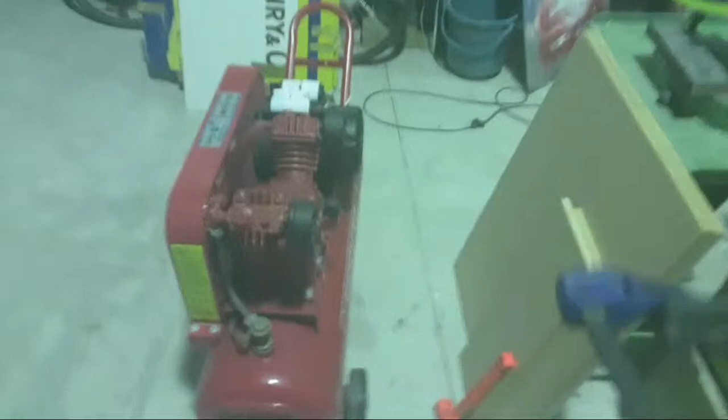We've got this set up the wrong way. It's sort of a good thing, but it doesn't always work that well. Hang on, let's fix this. Got 2 sheets of MDF here, which is sort of in the way, but that's a work project, so we'll get them out of the way soon enough. Need a bigger clamp - there we go.

So anyway, picked up this air compressor - a friend had it sort of as surplus, along with a lot of other junk, and couldn't really be bothered finding out what was wrong with it. So it had an electrical problem apparently, and he asked for an offer, and I made an offer that was a bit ridiculous, and we sort of negotiated a bit on that. And I come home with an air compressor that wasn't working, which is cool because I need an air compressor.

Let's have a look here. We can turn it around sort of half a turn. It says it's 283 somethings - 283 litres a minute, that's the pump displacement, and free air delivery is 178 litres a minute. So, yeah, I don't know if that's good or bad or what. Humidity 90% sounds fantastic, it's freezing cold here.

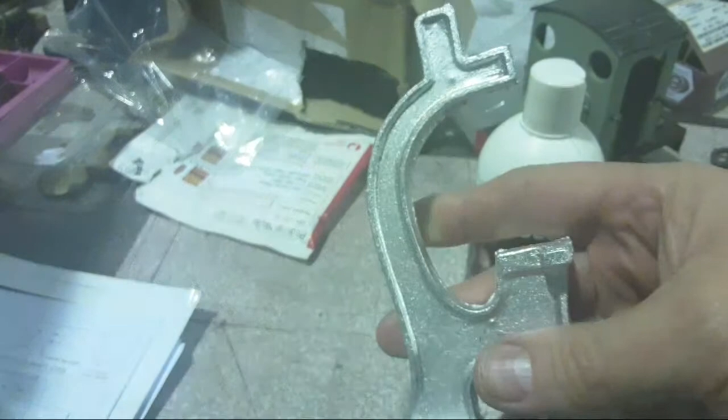So anyway, I've hit up a gentleman in the UK who posted a video about this awesome little bandsaw. I'm sure he's probably watching, so I'm going to... We might as well just get into it. myfordboy posted a video about this awesome little bandsaw that he made, MFB on there.

Nice casting, with 3D printed wheels, like bandsaw wheels for the belt, and another drive wheel, which are nice little 3D prints actually. Not bad 3D prints at all, considering all things. Yeah, right.

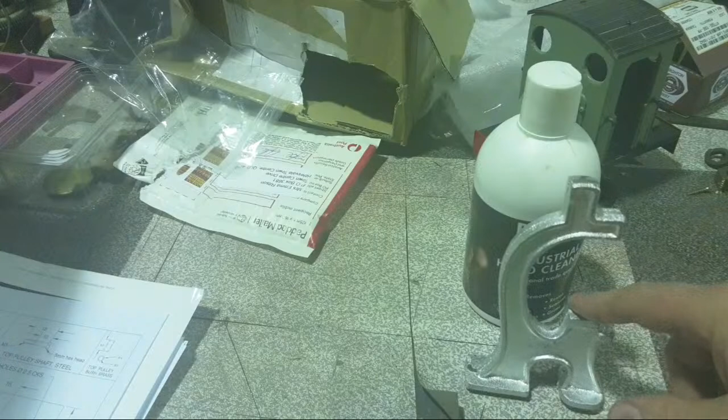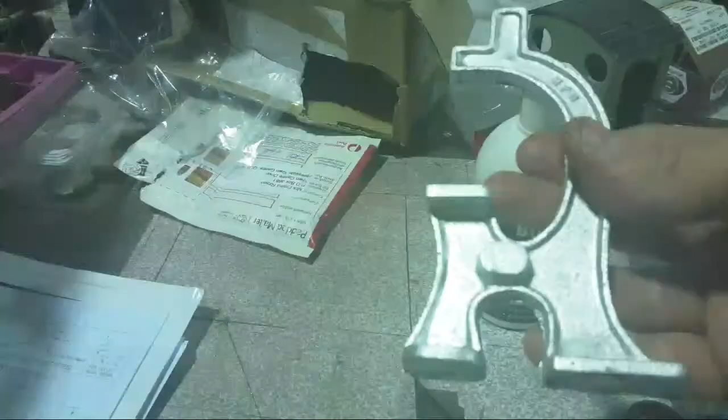And this little saw, I sent him an email saying, hey look, I'd like one of them, so anyway, we organised that, and he said, 'I'll cast you one.' So anyway, he posted it along, which is a nice little, pretty high zinc aluminium casting. It is a nice casting, nice finish on it. From experience, it'll probably machine pretty nice. It's not a huge job. Comes with a drawing sheet.

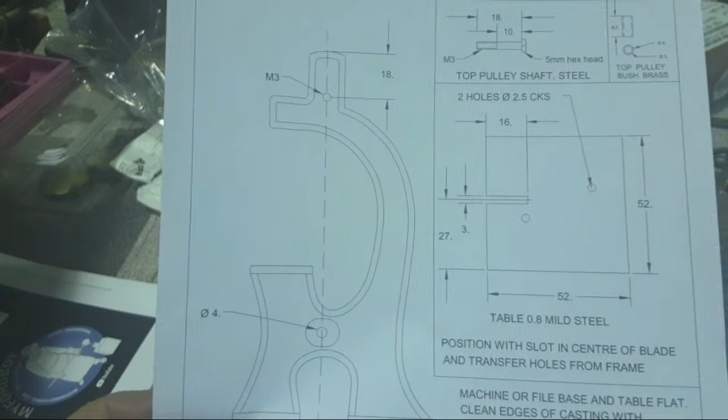I've already got a myfordboy steam engine, so that's probably what's going to drive it, to be honest. It's a bit overpowered, but we might have to make a line shaft or something for it. So pretty simple job. There's a table, which is a bit of 0.8 mild steel sheet metal. There's a bolt and a bush for the top, and a drive shaft that goes through the middle, and a couple of flat surfaces and 6 holes, something like that.

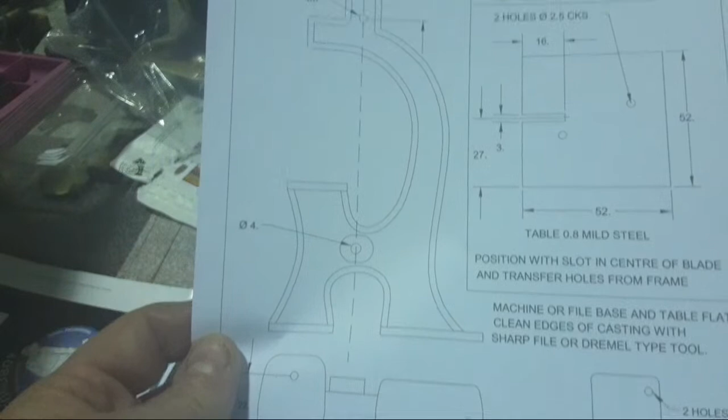It's pretty straightforward, just a toy. It's based on, I think probably, a Mamod Model Workshop accessory, and it's not too shabby. So at some point when I've got a mill, that's a weekend's work, and it'd be fun, and we could belt it up to myfordboy's little engine and have a pretty cool little workshop, or the start of one. And as he releases them, we could maybe get some others. No pressure there.

Also sent, this is like a myfordboy sticker, really - it's almost impossible to get. Sent some stickers, so I'm going to put one on my board, and I might redistribute the others at some point. So there we go.

That's pretty exciting. Now, issue being that while we're on the job and things were coming from the UK - this is something I've been thinking about for some time, and this is where it all gets a bit sticky and a little bit difficult morally and ethically, and a little bit complicated.

Because coming this crap, where can we move this? Move this up here, I'll lock this back on here. There we go, without disturbing anything. Don't know if we can see that, but it come in this box, and the bandsaw was a bit stupid in this box, so we thought we might as well pad it out.

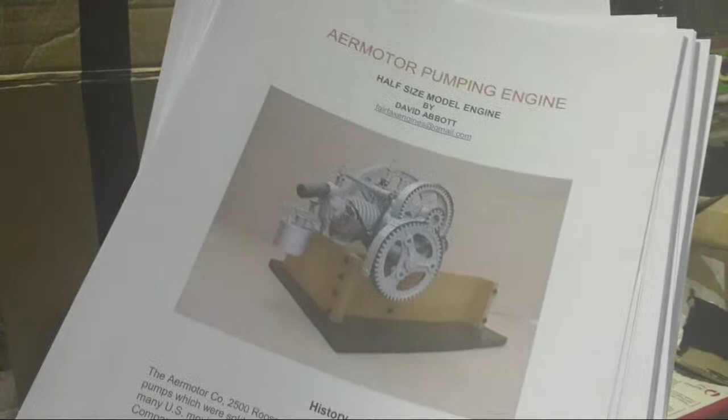Anyway, this box come from myfordboy, which is awesome, but it seemed a bit pointless just sending it empty. So he sent some stickers, and he sent the bandsaw, and he sent a set of drawings for this, which you may have seen if you watched myfordboy's videos back far enough.

And what else? A set of flywheel - move this over so you can see. Nice flywheel, and the pump gear, and the push rod.

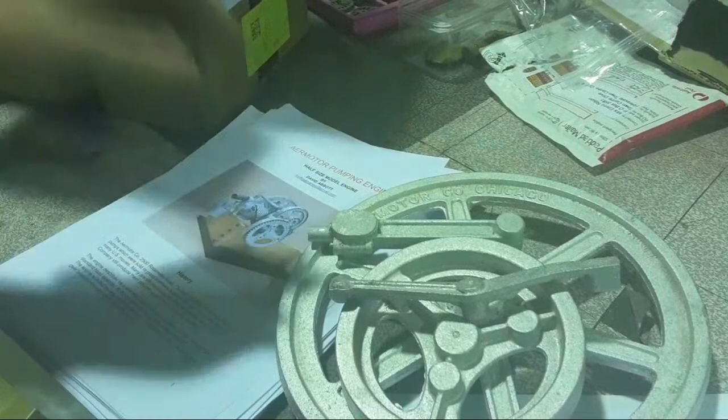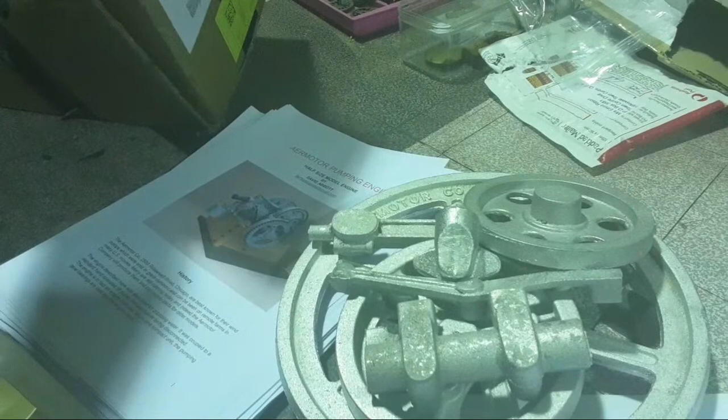And a con rod, and some other fittings, some main bearings, and a timing gear, and a carburetor, and an igniter casting, and a bit of corian for an igniter insulator, and what I believe is probably timing gear or pump gear, something like that. And a crankcase casting.

Now, everyone's going to get all upset about this, right? Because I have a very, very, very, very, very bad track record with internal combustion engine models.

However, this is one of myfordboy's biggest engine casting kits, right? And as such, I don't think that he's going to be making them forever. I'm saying another 20 years probably is your time frame on this. But it won't hurt to have one sitting here in case at some point I finally get that Stewart 500 running, the Stewart running.

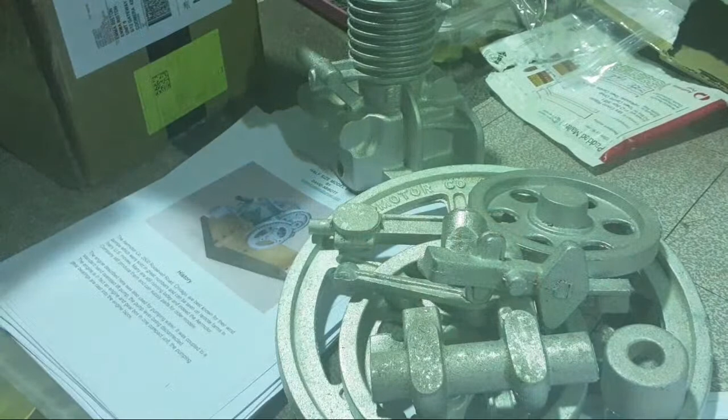Anyway, this isn't going to happen any time soon. They're all aluminium castings, but most of them are fairly zinc heavy, so they're pretty solid castings. There's some complicated bits like a trip igniter. And there's a couple of 12 DP gears - I don't know if they're 12 DP. I know that these ones are, this one and this one. This one here and this one here, I think are 12 DP.

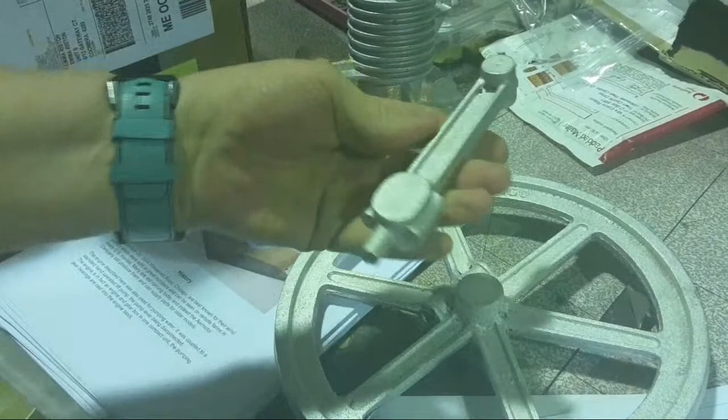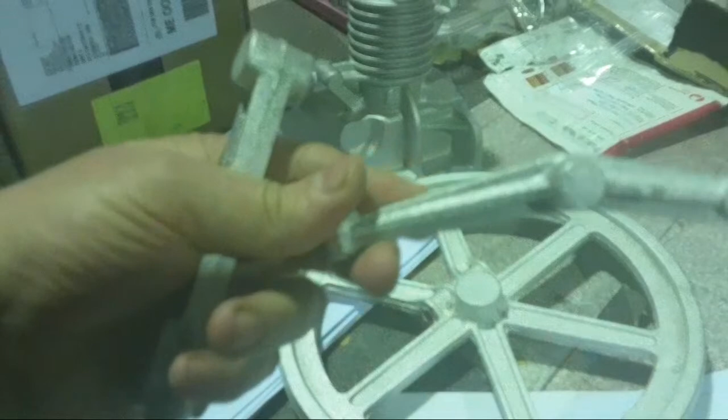So there's a little con rod, which is aluminium too. It shouldn't backfire and bend that, I guess - it's pretty solid still. There's a nice long tappet or rocker arm for the intake valve, or the exhaust valve, that is, and that's the exhaust valve.

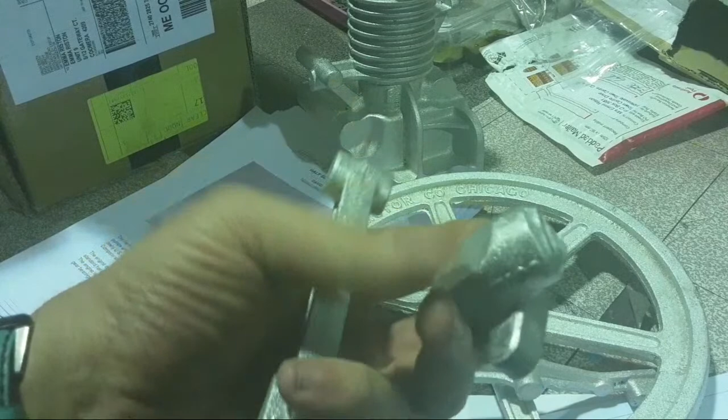That's a timing gear, apparently, I think. There is a video at the myfordboy channel about this. This is a fairly solid flywheel, but I think we can machine that.

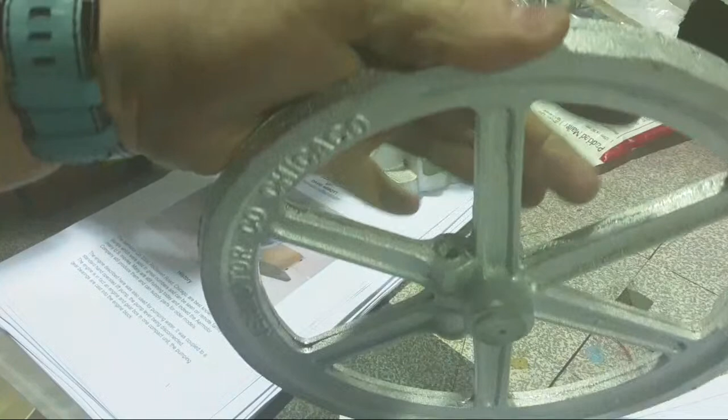It's actually got a cored bolt hole there, and then it's split halfway through and machined with a key. The bolt doesn't do much, only just for cosmetics, I think. But it's not a bad looking flywheel. That's pretty heavy, actually - pretty solid flywheel.

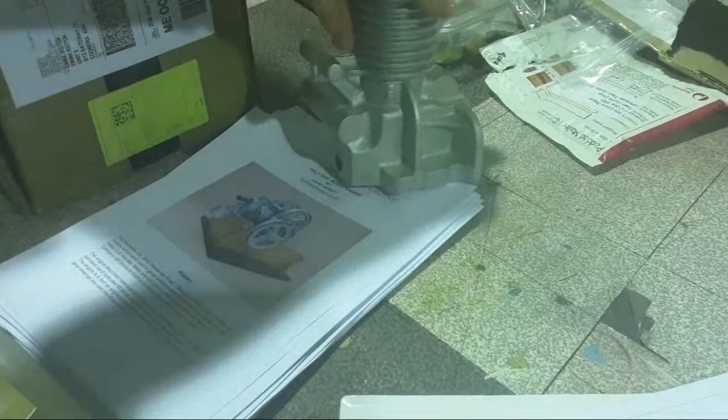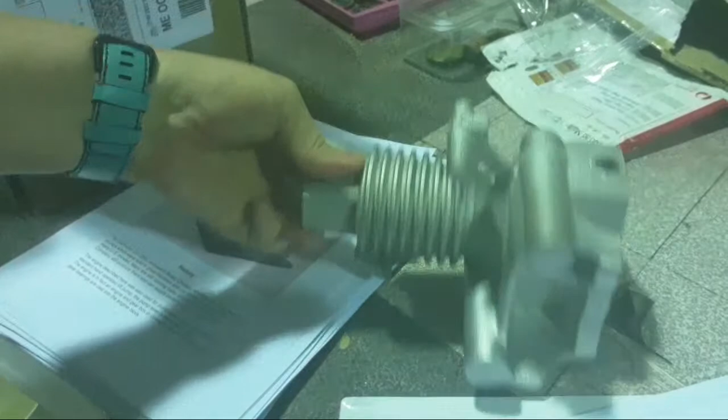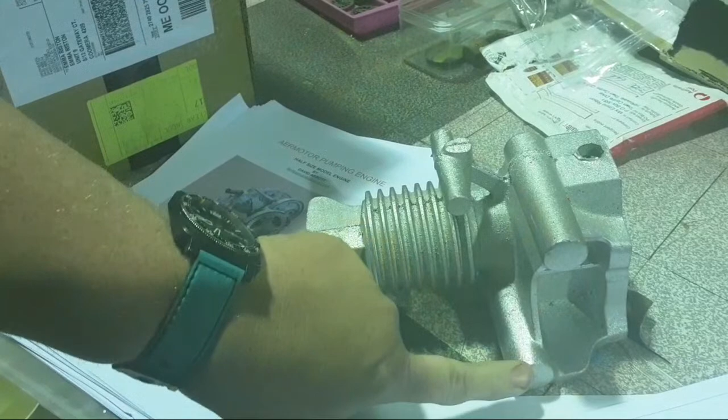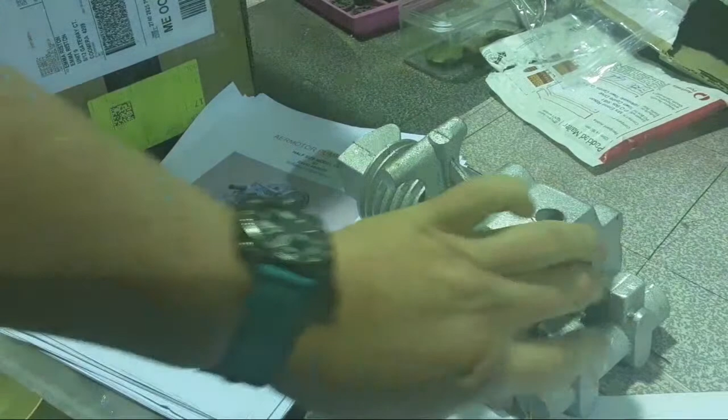It's got letters and everything in it. And there's this, which has a cast iron liner that goes in it. The rocker arm goes on here in the igniter drive, and the camshaft's on this one, I think. And the main pump drive for the windmill pump goes on here. The crankshaft goes on the back here with a couple of bearings, which are these, with spaces in them for little oil pots and everything.

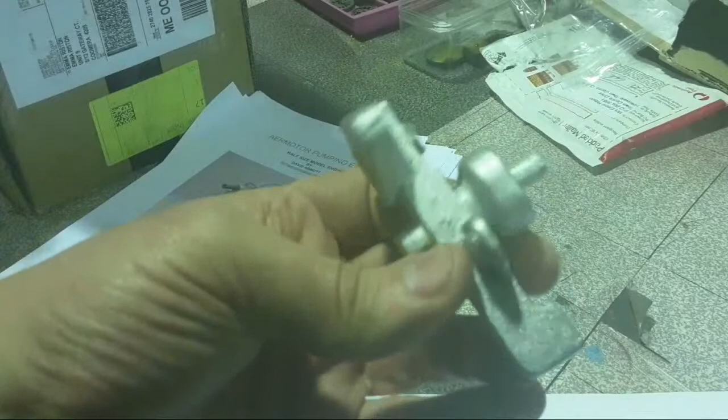Now, I don't know about this. I thought this was a cored casting, but it doesn't look like it was. To my mind, when I saw the video - I've watched it a few times over the last 18 months - I thought I'd like one of these. It looked like a very, very fiddly casting to do with a core in it. I'll forgive him if it doesn't, but it's probably not a huge deal just to drill it.

But that's a carburettor casting. Chirpy, you're right on, yeah, that's right. It's got a... he says that, but he's cast this with a zinc alloy, so seriously, there's plenty of weight in that.

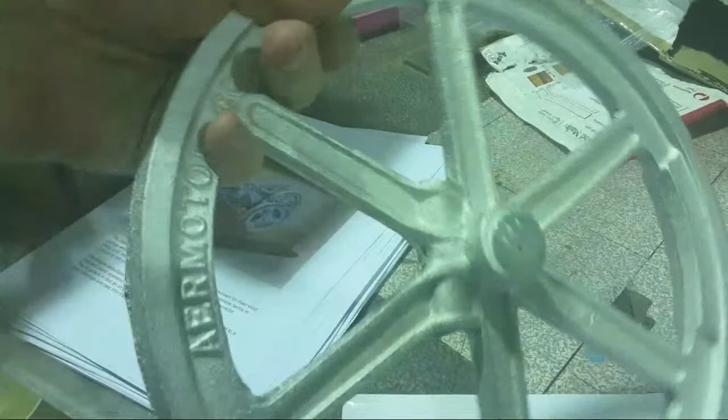That's a pretty heavy flywheel. That would weigh probably 4 kilograms, something like that. So some nice castings.

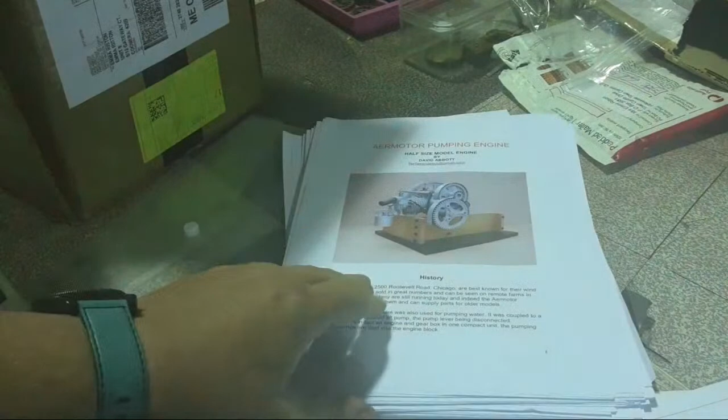It's got a book with basically pages and pages and pages of drawings and notes on building each and every part, how to set it up, how to build it. There's a reasonable chance with a book like this on building an engine I might be able to get it running. I'm going to have another go at the Stewart first, but anyway.

That's MyFordBoys' Aermotor pumping engine.

Now, I was going to get - somewhere I have a copy of C.H. Wendel's American Stationary Engine book, which is autographed by the great Chuck Wendel himself, with my name in the front. I have no idea at all where it is. I can't find it since I moved. I've got no idea, it's a bit scary. I may have lent it to someone, or I may have given it to someone, or I may have sold it - I don't think I would have sold it. It may still be in Tasmania somewhere.

Could be in a box of books that my sister is actually going to send up here in the next little while. Apart from that, I've got really no idea, unless maybe she sold it - put it up for sale and sold it, I don't know. But I did have a copy of it, and it's a fairly expensive book, and I'm not sure if it's still in print. But that had half a dozen pages on the history of these things and different models and things, and I was going to get that out, but I can't find it. Anyway.

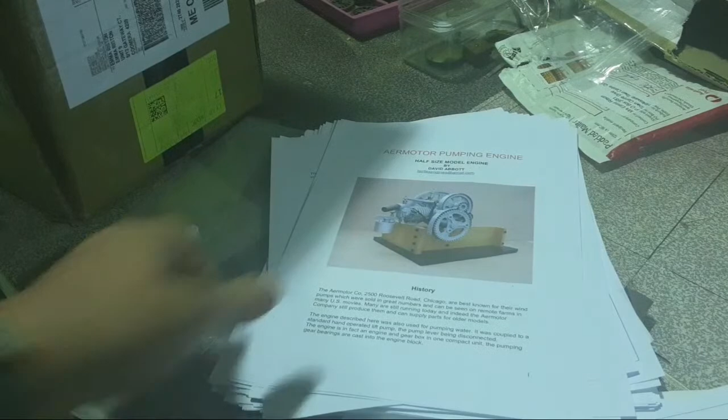These are all A4 drawings for economy, I guess, and easy to post and all that sort of stuff. But there's about 10 sheets for the crankcase.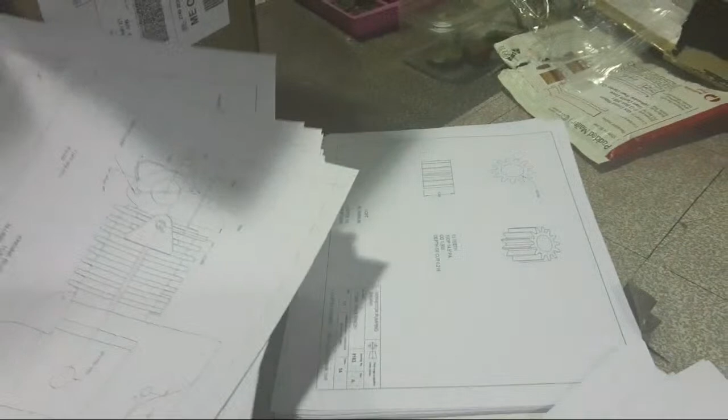Some bits are quite simple, like gears and igniter rods and things like that. It's a fairly simple engine, really, but I've said that before, and I'm a bit nervous about starting it. There's pages for the igniter and all that stuff.

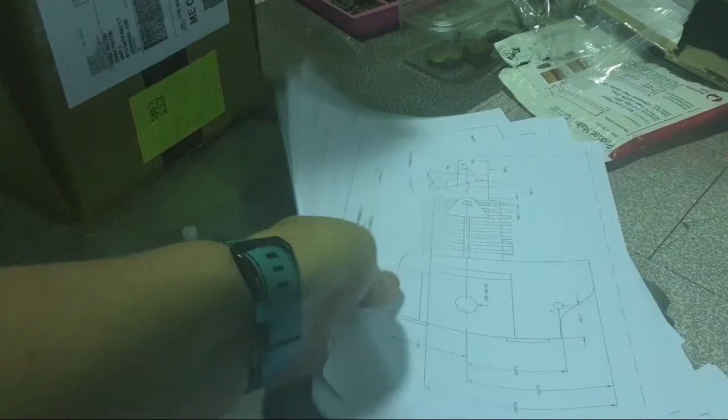I'd like to believe I could build it. I'm not as confident as I would like about that anymore. No confidence at all about internal combustion engines, but one day I'd like one that runs.

Anyway, everyone's lost for words now. That's blown everyone away.

Is it similar to the Maytag? No, it's an 8-stroke hit and miss engine. It's got that overall look about it, but it is an 8-stroke, which means that the camshaft's 4-to-1 on the crankshaft. So it's got 6 exhaust strokes, an intake and a compression, and a power, and must be 5 exhaust strokes. So that's what keeps it cool.

It runs sort of pretty slow, or appears to run pretty slow. They were a very small engine. This is a half size, so they weren't a huge big engine.

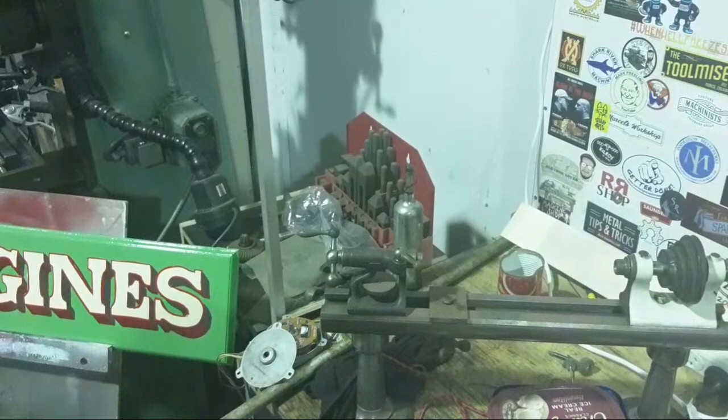What else? Working on this too. Oh, skid this round here. It's going to fall off the end, isn't it? Yeah. Hang on. We'll loosen this off. Probably it'll just drop down out of the way. There we go.

So there we go. I've got a steam engine event down in New South Wales on the last week in July. We'll have more about that at some point. I don't know whether anyone's going to go, or whether we're going to actually get some videos, or whether it's going to be a whole lot different to the schedule.

But this is just a sign that I'm putting together roughly. It's nowhere near finished yet, and I'm really not sure I like all the red in it, but it might get some work. Just a bit of lettering on a bit of form ply with a nice machined edge, and we'll be tucked away down the back corner somewhere at that event, so it might be nice to put a sign up somewhere. So I was sort of working on that. That's another job we've been doing.

What else? Oh, here's something I did this week. Dan might go - he said, I think he's taking the steam engine. So there you go.

So, progress on the harmonograph. There isn't any. There is a little bit. We'll come around this side of the bench and we'll have a look here. This weekend was a bit of a write-off and we didn't do a whole lot.

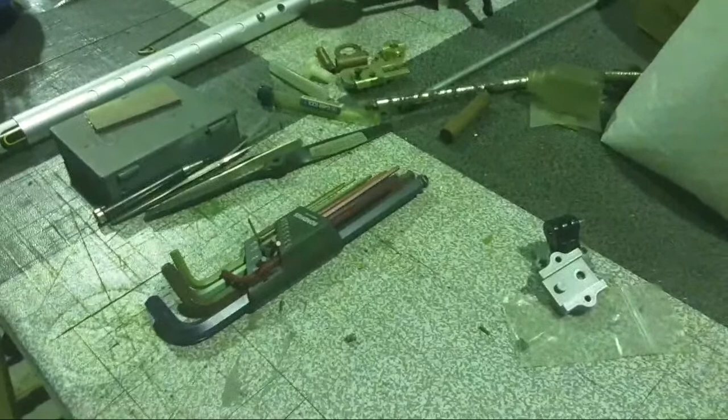We've got a bit of a dilemma. I don't really know where to even look for this. I was chasing nice wood screws, right? And we've already been down this road - I think we've had a whinge about this already.

Yeah, got these round head screws, which really aren't what I was looking for. But they've got a cross head in the middle, and that's a bit ugly. It doesn't really look particularly vintage. And they're too long and all that sort of stuff.

So I hit a guy up on eBay, and I thought I was getting some countersink screws with dome heads - that's what I thought I was getting, you know, with a top round curved top, don't know what you call them. But anyway, I've got these flathead countersunk screws that are the right length at least.

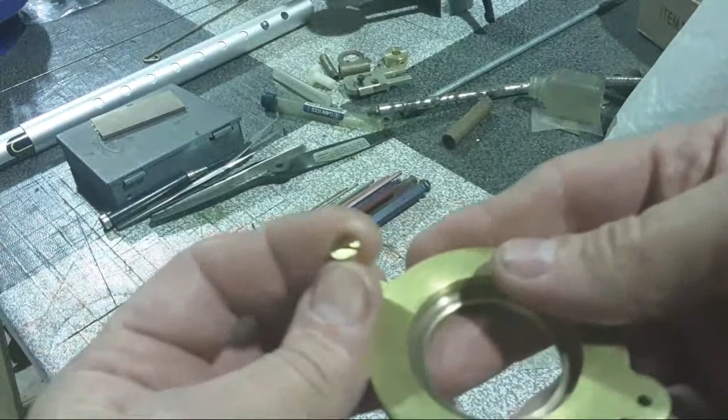So they're to screw this down, and they're drilling out yet, but they might do the job. We'll see - if I can find the right ones, we might. But I've got a box of those, and they weren't very expensive.

Max from Joy of Precision - yes, I know Max. Best way to contact Max is probably Facebook, or Instagram - hit him up on Instagram because he usually answers Instagram messages. If you can't, hit up Justin and he'll know where to find him. Failing that, hit up Stefan. At least then that might persuade them to make a new podcast.

Max, I haven't seen for some time, hasn't posted anything. I haven't seen anything from Justin either. So I know him and I've been in touch with him and I've talked to him a few times. And I haven't seen anything sort of remotely new from him. So good luck with that.

Anyway, if anyone knows the correct term for a countersink screw with a round head on it and a slot across the middle, let me know, because I haven't got a clue.

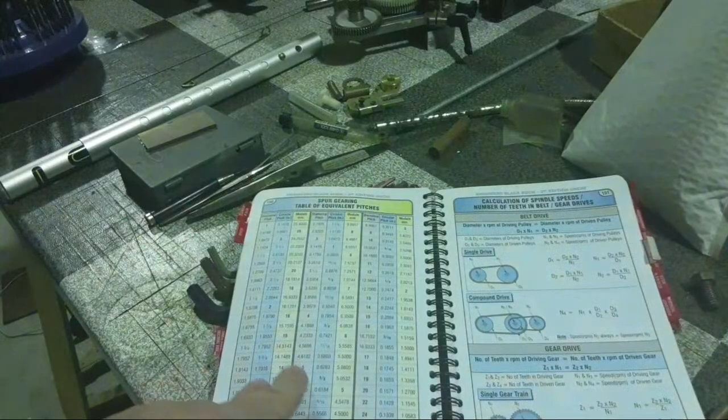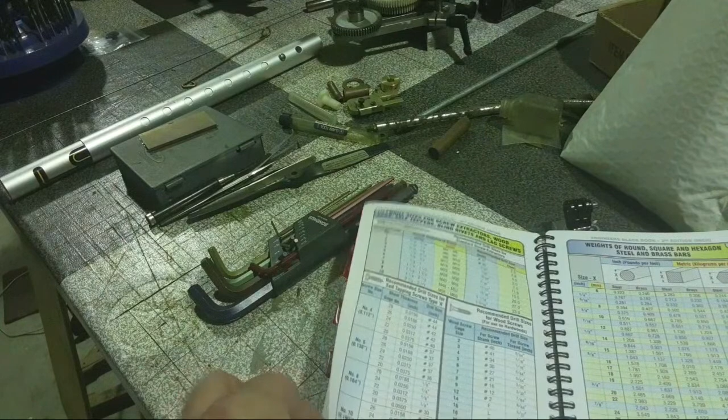Let's have a look here. Screws. Screw and bolt head types. Wood types, 132. Steel pipes. Weights of sheet metal. Drill sizes for screw extractors. Drill sizes for wood screws. It's not that. Bolt heads. Bolt types. Screw head drives. Common screw thread points. Common workshop washers.

We're getting closer. Here we go, undercut oval head, that says, but I'm not sure whether that's really what we want. Common self-tapping screws, oval head, this says. It might be an American term. I've never heard of oval heads, but anyway, there we go. Maybe if I just went and asked for oval head screws, that's what I'd get.

Anyway. Frank Ward, good to see you. Sorry you stayed up. Take care, everyone, anyway. In aviation, it's an oval head. Yeah, thanks for that.

This was a bit special, actually. This is a summer bash edition, this one, 2019. Gosh, it's 2 years ago. 3 years ago. Gosh, where's that gone? Don't know. This one's signed in the back, which was really sweet of him to do that. It's a really nice thing, above and beyond.